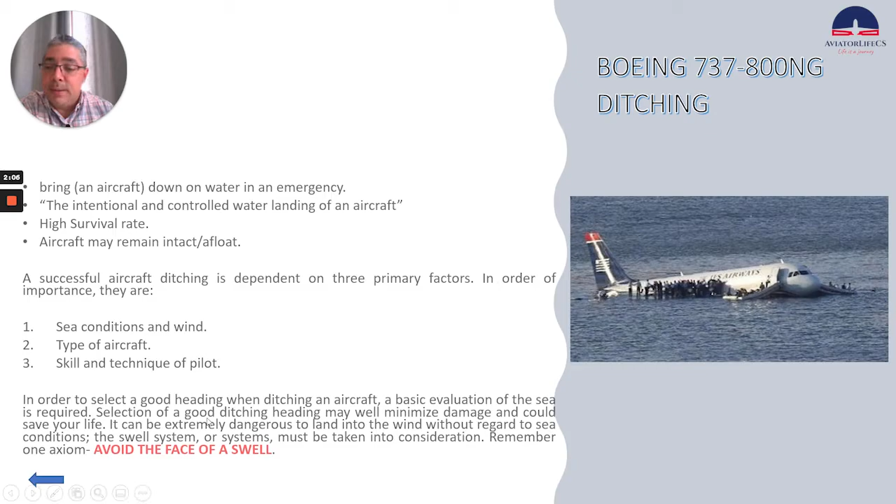Now let's go back to the index here and let's talk about the swell versus waves. So here in this picture, we can see wind waves are generated by immediate local wind. They are not self-sustained and will die out when the wind stops. So here you can see the wind direction and you can see the waves forming here.

Now the swell waves are self-sustained and generated by energy beneath the ocean's surface, no longer needing local wind. So you see at the end of the local wind source, wind waves become swell waves. And then you can see the systems here. It's a nice picture where you can see a good explanation about them.

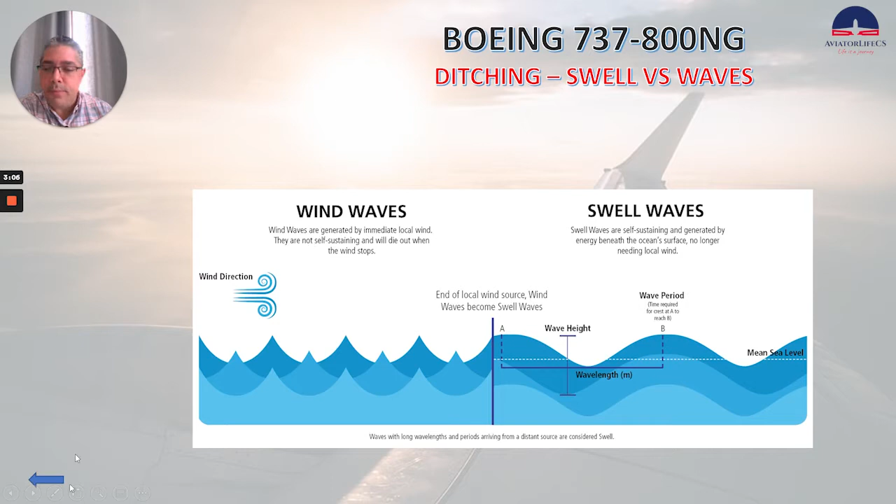Now, something I want to mention here is about the GCAA Part 4 Operations Regulations. GCAA is the Aviation Authority in the UAE. They talk about ditching in Subpart B, General. An operator shall not operate an airplane with an approved passenger seating configuration of more than 30 passengers on overwater flights at a distance from land suitable for making an emergency landing greater than 120 minutes at cruising speed or 400 nautical miles, whichever is the lesser, unless the airplane complies with the ditching requirements prescribed in the applicable airworthiness code. Okay, I thought that was important to know.

Now let's review what the FCTM says about ditching in the non-normal operations section. Ditching: send distress signals, transmit mayday, current position, course, speed, altitude, situation, intention, time, and position of intended touchdown, and type of airplane using existing air-to-ground frequency. Set transponder code 7700, and if practical, determine the course to the nearest ship or landfall.

Advise crew and passengers: alert the crew and the passengers to prepare for ditching, assign life raft positions as installed, and order all loose equipment in the airplane secured. Put on life vests, shoulder harnesses, and seatbelts. Do not inflate life vests until after exiting the airplane. Fuel burn off: consider burning off fuel prior to ditching if the situation permits. This provides greater buoyancy and a lower approach speed.

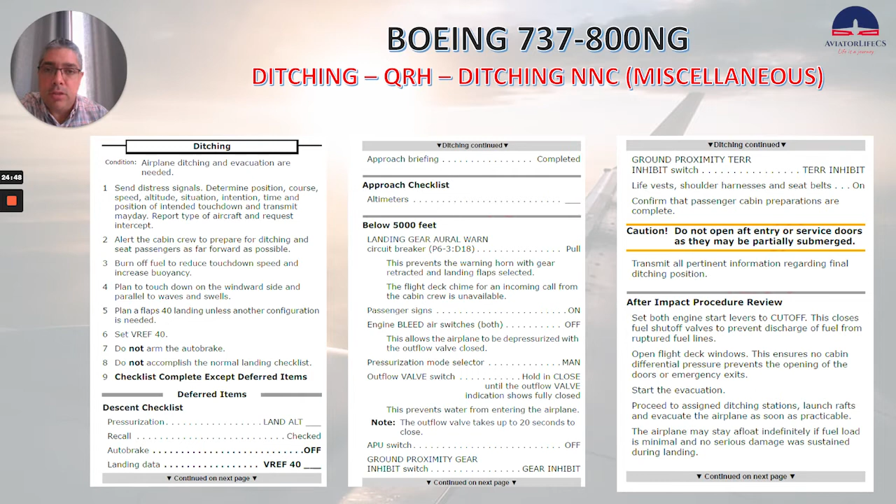Okay, now let's review some pictures I found in the FAA AIM, which I'm going to leave a link in the description below so you can go there and check it out. It's section 6.3.3, ditching. And they show the swell system. In this case, we have a single swell, 15 knots wind, and you see the ditching heading and where the wind is coming from. And you can see the swell system here.

Now, in the next picture, we have a double swell, 15 knots wind. You have the primary swell system here, and you have the secondary swell system here. Wind coming from the left, and this is the ditching heading here. Now, if we review the next one, it's a double swell, 30 knots wind. Primary swell is coming here, secondary swell, wind, and this is the ditching heading here.

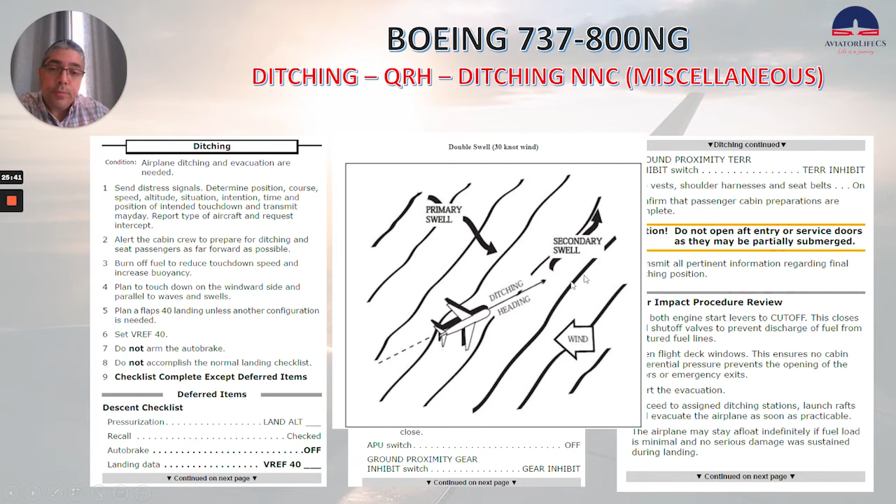The next one, we'll see a 50 knots wind, and it says aircraft with low landing speeds land into the wind. Aircraft with high landing speeds choose a compromise heading between wind and swell. You can see the difference here, okay? Both land on the backside of swell.

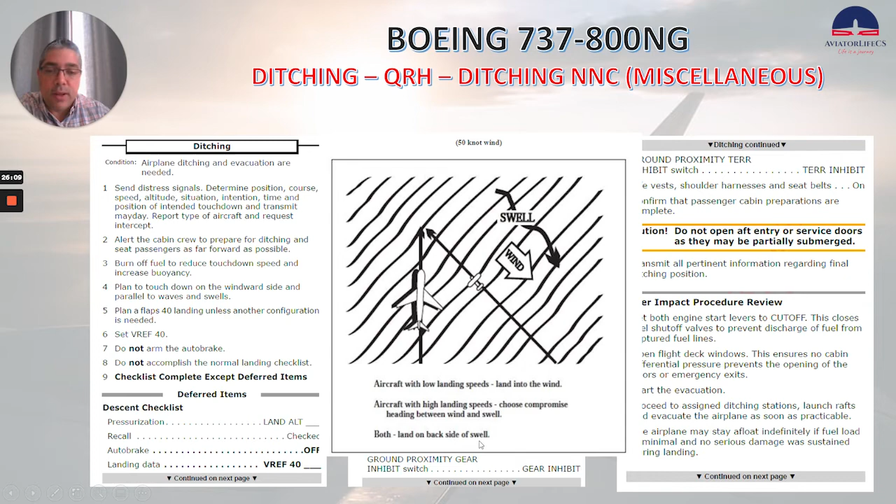And this final picture I'm going to show you here, wind, swell, ditch heading. Here you can see the direction of the swell movement. Landing parallel to the major swell. This is the best position here. Fair, good, and good. Landing on the face and back of swell. This is the face of the swell, and this is poor. Don't do this. And if you land on the back side, it's good.

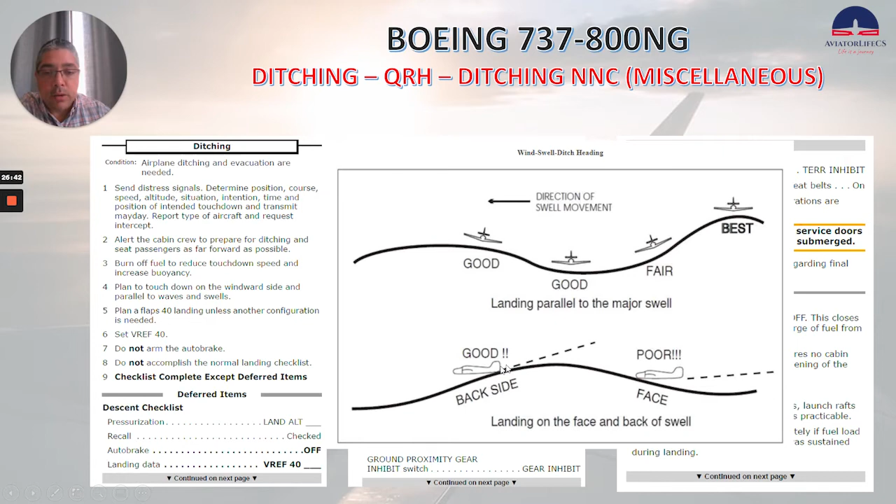All right. Now let's continue to the ditching final in the QRH. It says landing gear lever up and off, flaps 40, green light. At 500 feet, advise the cabin crew that ditching is imminent. This is the captain, brace, brace.

At 50 feet, advise the cabin crew to brace for impact, maintain airspeed at VREF, flare the airplane to achieve the minimum rate of descent at touchdown, maintain 200 to 300 feet per minute rate of descent until the start of the flare. At flare, rotate smoothly to a touchdown attitude of 10 to 12 degrees.

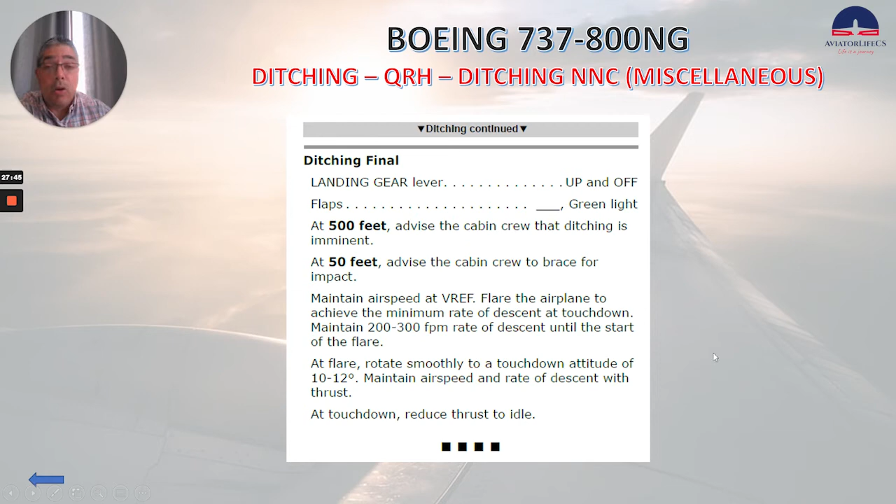Maintain airspeed and rate of descent with thrust. At touchdown, reduce thrust to idle. And that's the end of the ditching non-normal checklist.

Now, something I want to show you here, and I'm going to leave a link in the description below as well for the Transport Canada AIM. And I like the information they have there for ditching. It's very summarized, and they have the most important things to think about during the ditching here. We can quickly read it.

Ditching. When flying over water, a pilot must always consider the possibility of ditching. Aircraft operating handbooks usually contain instructions on ditching that are applicable to the type of aircraft. Also, the flight training manual discusses this topic. On the high seas, it is best to ditch parallel and on top of the primary swell system, except in high wind conditions. Remember the pictures we saw before.

The primary swell is usually recognized first because it is easier to see from a higher altitude, while secondary systems may only be visible at a lower altitude. Wind effect may only be discernible at a much lower altitude from the appearance of the white caps. It is possible for the primary swell system to disappear from view once lower altitudes are reached, as it becomes hidden by secondary systems and the wind chop.

Some guidelines can be adopted. Never land into the face of a primary swell system unless the winds are extremely high. The best ditching heading is usually parallel to the primary swell system. In strong winds, it may be desirable to compromise by ditching more into the wind and slightly across the swell system.

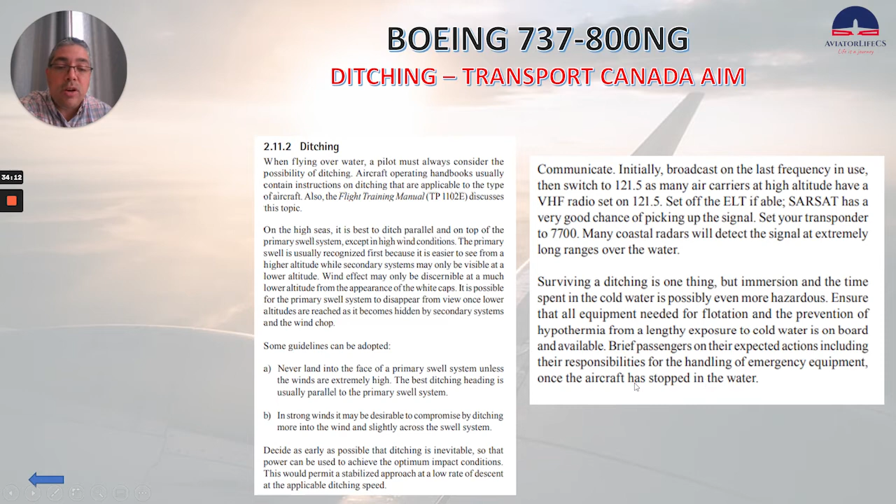Surviving a ditching is one thing, but immersion and the time spent in the cold water is possibly even more hazardous. Ensure that all equipment needed for flotation and the prevention of hypothermia from a lengthy exposure to cold water is on board and available. Brief passengers on their expected actions, including their responsibilities for the handling of emergency equipment once the aircraft has stopped in the water. All right.

So lastly, let's check the cabin crew actions during ditching. In the event of an unplanned landing on water, cabin crews should follow these guidelines. This is the time frame, 500 feet AGL, about 30 seconds to impact. Captain's command: this is the captain, brace, brace. Cabin crew actions are: adopt appropriate brace position, instruct passengers to adopt brace position by shouting heads down, brace, brace.

After impact and complete stop of the aircraft, if there is no command from the captain, cabin crew initiate their own evacuation due to a catastrophic situation. Cabin crew actions: release harness and stand up, put on own life jacket, command passengers to put on their life jacket, evaluate outside conditions and check water level, initiate evacuation, operate respective exits, disconnect the escape slide, evacuate all passengers, instruct passengers to inflate life jacket on exiting the aircraft, check cabin if safe to do so, collect useful equipment, inflate own life jacket on exiting the aircraft.

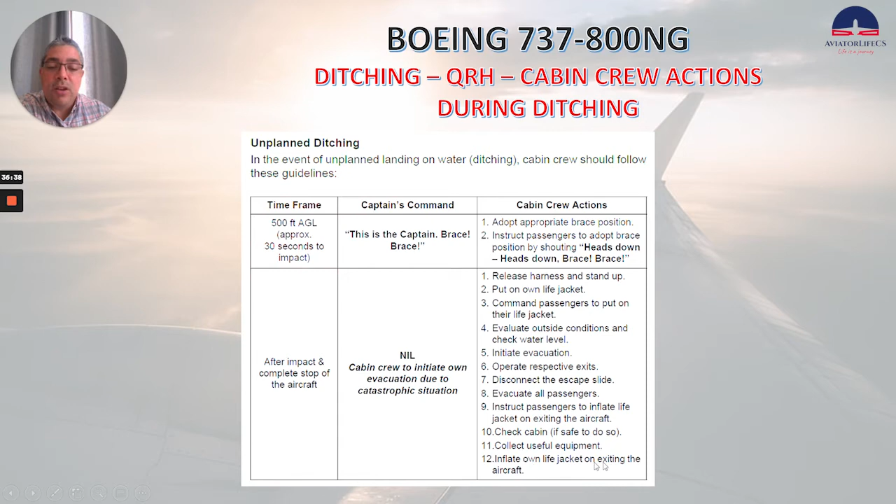Now, if we see a summary of evacuation procedures for ditching, after touchdown drill ditching: check door is armed, check outside for fire hazards and above water level, exits open fully if safe and pull manual inflation handle, disconnect escape slide, guard if unsafe, redirect passengers, evacuate passengers and instruct to inflate life jackets as they leave, check cabin area is clear and then flight deck, collect useful equipment.

And on this side, we have the procedures for ditching on an ETOPS, which is an extended twin engine operations aircraft. And you can see there are a few differences between both of them. We'll start from here. Check door is disarmed. Check outside for fire hazards and above water level. Exits open fully if safe. Manhandle life raft to exit. Anchor mooring inflation line to anchor point and launch life raft. Inflate life raft. Guard if unsafe.

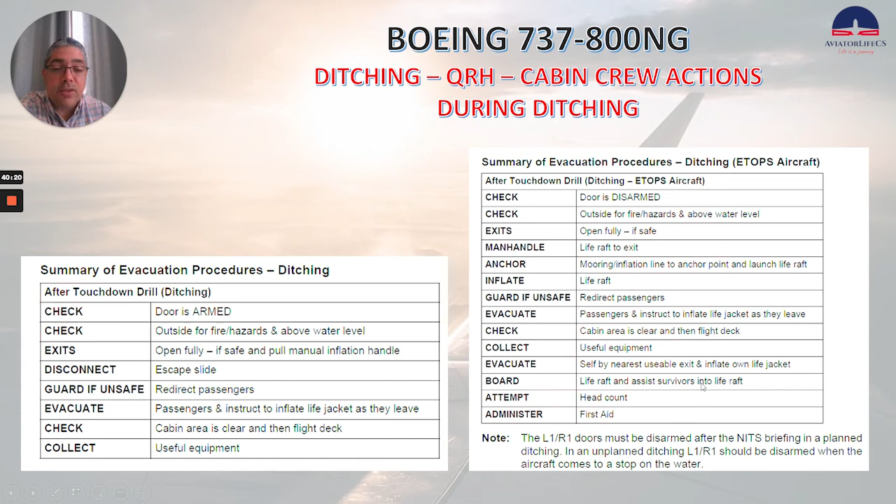Redirect passengers. Evacuate passengers and instruct to inflate life jacket as they leave. Check cabin area is clear and then flight deck. Collect useful equipment. Evacuate self by nearest usable exit and inflate own life jacket. Board life raft and assist survivors into life raft. Attempt head count. Administer first aid.

And now, finally, let's check some evacuation commands. Evacuation commands must be phrased in a positive manner and may need to be improvised depending on the situation and passenger reaction. Commands that could be shouted during evacuation are, and let's focus on the right column here, it's about ditching. Planned ditching: open your seatbelts and get out, twice. Stay back, repeat as necessary. Come this way, come this way. Inflate your life jacket, jump, repeat as necessary.

In an unplanned ditching: open your seatbelts, put on your life jackets and get out, twice. Stay back, repeat as necessary. Come this way, inflate your life jacket, jump, repeat as necessary. And then if we see the last two columns here, for the planned ditching, ETOPS airplanes: open your seatbelts and get out, twice. Stay back, come this way, inflate your life jacket, jump, get into the raft, or inflate your life jacket, get into the raft.

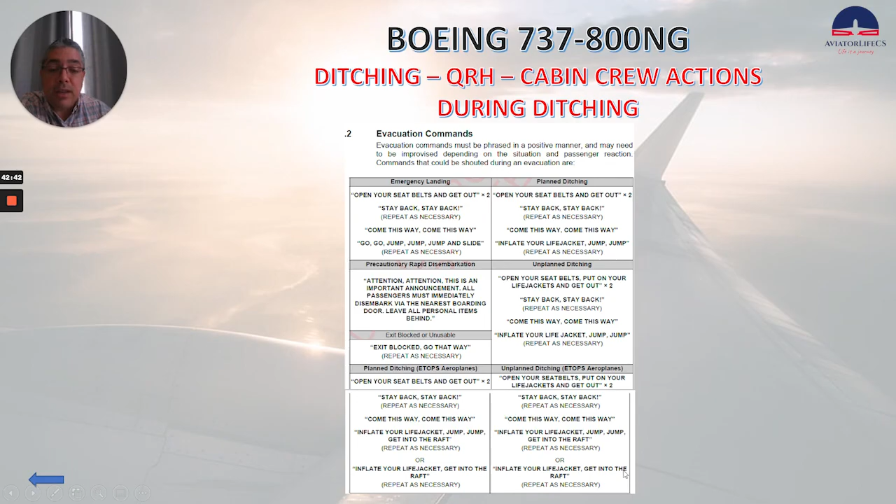In an unplanned ditching for ETOPS airplanes: open your seatbelts, put on your life jackets and get out, twice. Stay back, repeat as necessary. Come this way, inflate your life jacket, jump, get into the raft, or inflate your life jacket, get into the raft. Okay guys, with this one we complete our ditching presentation today.